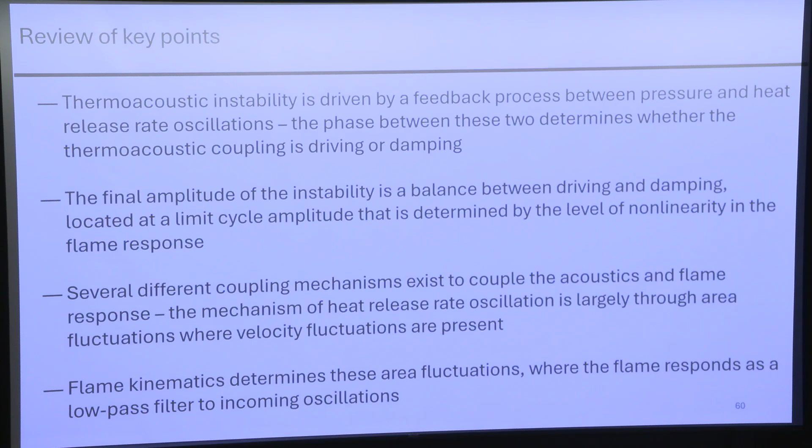The second piece is this final amplitude, or what we call the limit cycle amplitude, is determined by the level of nonlinearity in the flame response. One of the things we talked about last time was the fundamental place that this nonlinearity comes from. Using our craft here, we looked at flame wrinkles of different wavelengths.

The word used in the literature is kinematic restoration. If you have a wrinkle in the flame, as it propagates into itself and becomes not wrinkled anymore, that restoration of the flat flame and that very nonlinear destruction of flame area is referred to as kinematic restoration. It is the fundamental source of nonlinearity in flame response.

So if we have very weak driving of the system, you'll get very low amplitude wrinkles, and a pretty linear response as those propagate along the flame. But with big wrinkles with high curvatures, you get very nonlinear flame area collapse as a result of that shape. There are other sources of nonlinearity in flame response, and I'd be happy to talk about those at the end of class if folks have questions. But this is the fundamental one, and really the one I want you to take home.

So I'm going to skip to the last point here. One of the impacts of this is that flames act as low-pass filters. If we put really small wrinkles on the flame, these end up cusping and destroying themselves very quickly. And so the resultant flame area oscillation, and as a result, the resultant heat release rate oscillation, is very low because you have very quick destruction.

The way that we quantify this is using something called flame transfer functions. So we're going to have a quick intro to control theory for folks who have forgotten their transfer functions, which is okay.

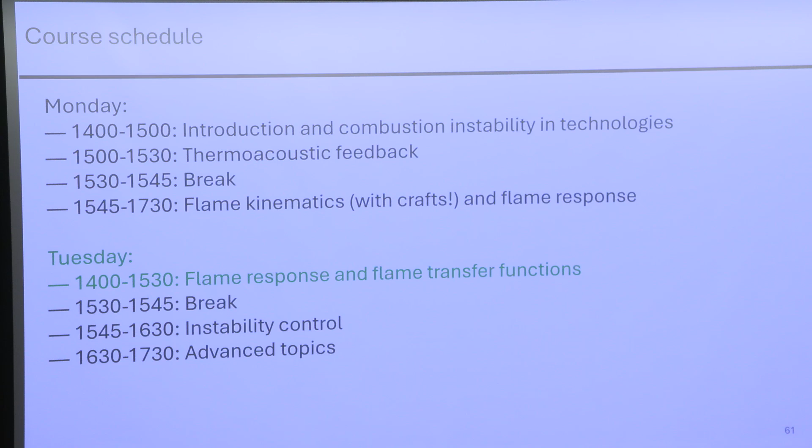We'll look at a ton of data that ties together things we've learned about basic flame kinematics and flame transfer functions. One of my main goals is for you to be able to look at a flame transfer function and infer the flame kinematics from it, which we'll talk about. Again, ignore the breaks, they're in the wrong place.

The last big topic we're going to talk about is instability control, and there are a bunch of different control mechanisms we use in real systems to damp these instabilities. We'll talk about a bonus control method related to hydrodynamic response, which is some of the research I'm doing. If anybody saw my plenary at the symposium two years ago, this will be a bit of a review; if not, this will be new and kind of fun.

And then there are some advanced topics. Just a quick reminder, I've purposefully left time at the end to address topics that folks are interested in, so be ready to talk about stuff at the end. Hopefully we will not have melted in this room that does not have air conditioning. Okay, so that's what we're doing today. Any questions before we get going?

No? Okay, cool. All right, so we're going to talk about flame response, and the framework we use to discuss this is called a flame transfer function.

One of the things I have found through my career is that control theorists have all the math you need to do the work, particularly in dynamical systems, but they don't always have the disciplinary knowledge to apply it. I've worked closely with control theorists and realized a lot of what we do, or things I thought were innovative, are things control theorists do all the time.

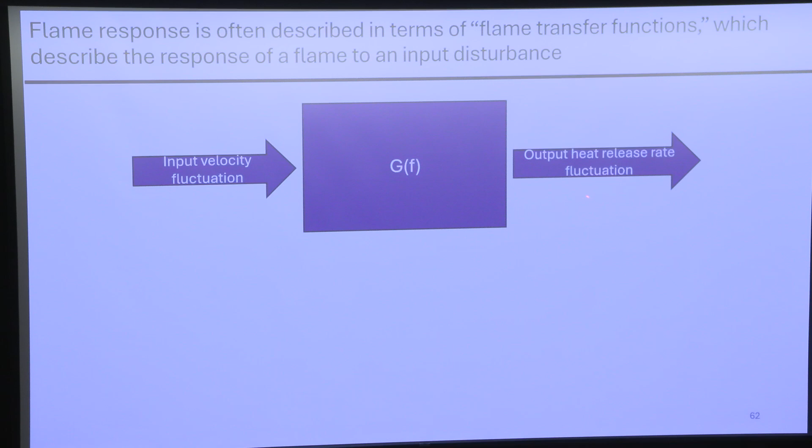You have some input, and in this case it's an input velocity fluctuation typically, or it could be equivalence ratio fluctuation or pressure fluctuation, depending on your coupling mechanism—but today we're going to talk about velocity fluctuations. What comes out of the system, where the system is the flame, is the output heat release rate fluctuation. The transfer function describes this input-output relationship. This is called a SISO system, a single input, single output system.

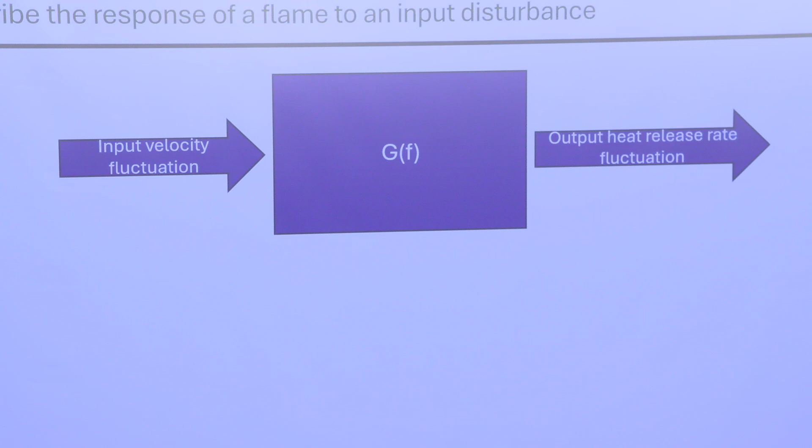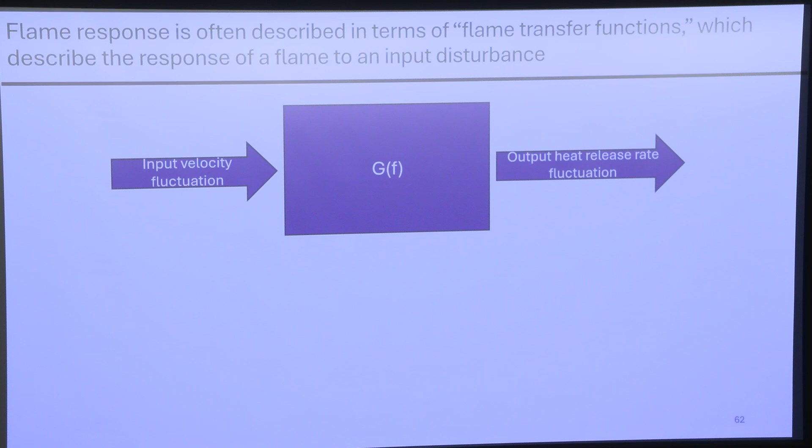There are multiple input single output, multiple input multiple output systems—there are a whole bunch of acronyms that go with this. This is a very common linear concept that describes responsive systems.

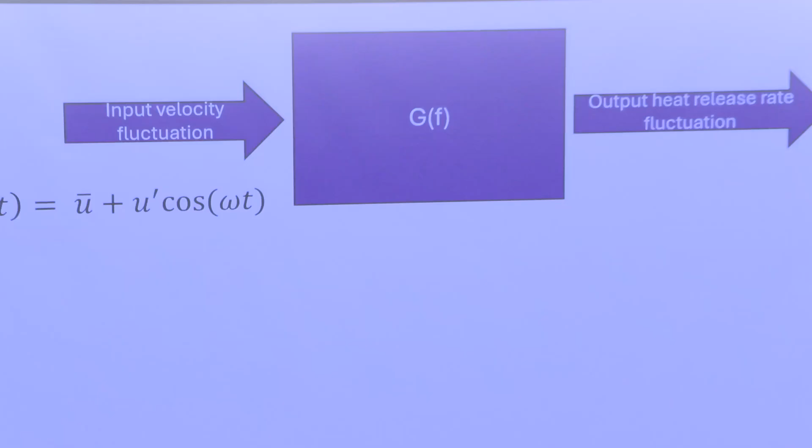So now at this point I did just put some math in the slides, so if you have the slides you're going to see all this. This is what we had been talking about yesterday: we said I have some input velocity field and it has a mean and a fluctuation. And I don't want to work in omega, so I'm going to throw in a 2 pi f, right? Like we said before, I don't want to do any of this in the time domain because I don't remember any of this jazz.

So we're going to do the Fourier transform, and when you do the Fourier transform, you end up with some input velocity fluctuation as a function of frequency. We'll talk in just a sec about how we measure these. You can see that our transfer function G is a function of frequency—it's a frequency domain concept, which is true here and in control theory more generally.

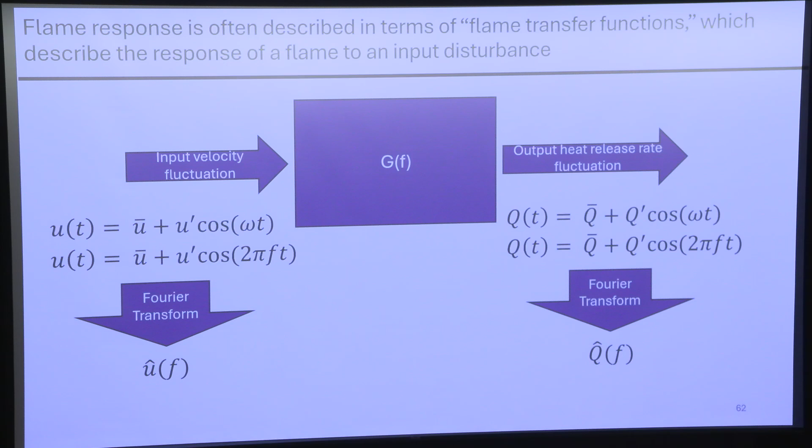All right, so that's the input. You can play the same game on the output: now I have some heat release response, a total heat release which is the time average plus the fluctuation. I go and do my Fourier transform, and now I have some Q hat of F—so that's at each frequency, the amplitude and phase of the heat release rate response.

To define my flame transfer function, I just take a ratio. Here it's a normalized ratio so the transfer function doesn't have a unit, because I don't know what the units of heat release rate over velocity are, and I'd like to be able to compare this between different systems. So what we do is take the response as a function of frequency, normalized by its time average, the input as a function of frequency, normalized by its time average, and then you get this transfer function.

Okay, cool. Remember that Fourier transforms are complex numbers. So what ends up happening is this transfer function has two components: one is the gain of the transfer function, and one is the phase of the transfer function. The gain is just the absolute value of this quantity, and the phase is the inverse tangent. If you're using MATLAB or something, you use either the phase or angle command.

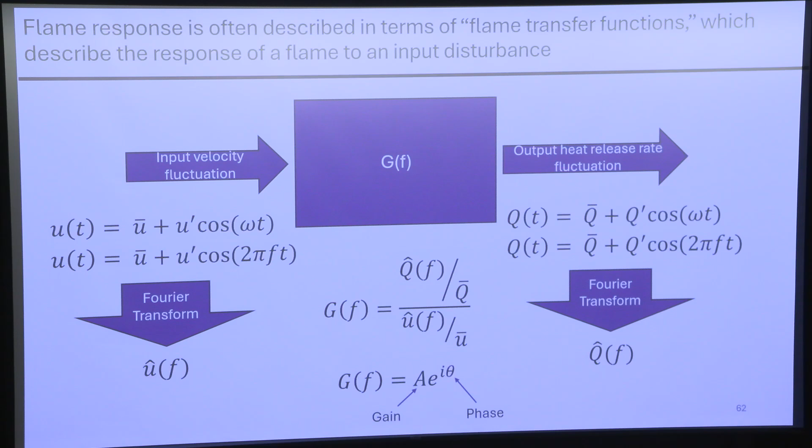So this is how we define it, and we get a gain and a phase. The way that we typically plot transfer functions is called Bode diagrams.

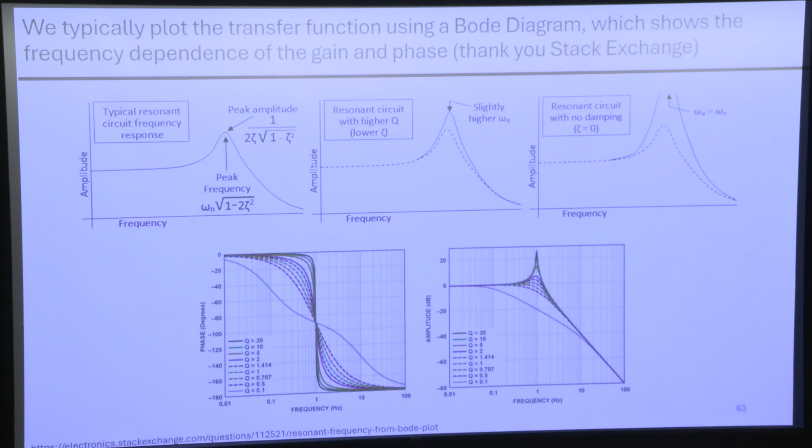I'm going to tell you a somewhat embarrassing but important story about paying attention in class. When I was in undergrad, I was totally convinced I was going to go into combustion. I was hardcore fluid mechanics, I was going to do gas turbines or bust. And I'm in this controls class, and by the end of it, the last two things we learned about were Nyquist diagrams, which, full disclosure, I still don't super understand. Sometimes I get a little wrapped around a pole. And then Bode diagrams. And I just gave up, I was like, I'm never going to use this again. 21-year-old Jackie really knew what was going on. Then I get to grad school, and I realize everything I do is a Bode diagram, and I greatly regretted not paying attention in that course. So the moral of that story is: take courses and pay attention to them, because they're going to come and bite you in the butt later.

But Stack Exchange has a really nice set of pictures, which is what I borrowed for this, that basically describe what a transfer function is.

Yesterday we talked about resonances. You don't just have resonances in acoustic systems, you have resonances in any oscillatory system. You can think about a spring mass damper system that has a preferred frequency, or a resonance frequency. So this is a really standard resonant or dynamic system, with a damping term in it, and so you have some resonance. You can see the way we're plotting here is just the amplitude or the gain of the transfer function, as a function of frequency. You can see the peak amplitude is at this resonant frequency.

And the amplitude's going to change based on what your damping is. So this zeta term right here is your damping. If you lower the damping, the peak gets higher. If you have a system with no damping, which you can do in theory but not in practice, you have a peak with an infinite amplitude at the resonant frequency.

Similarly, down here is just a plot of a bunch of different transfer functions. As you go up in color here, the damping is going down. So this is the amplitude, now on a log scale, which is often how we look at these things.

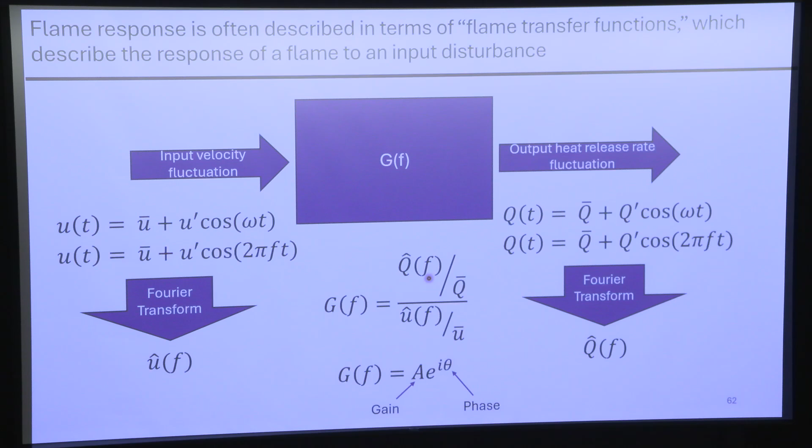If I need to know what the phase is for a thermoacoustic feedback cycle, this is a way to measure or calculate it, if you're calculating your transfer function. And here, at every different frequency, you can see the phase between these two disturbances. Okay, so this was what it looks like for just a general circuit system, right?

Not too exciting, but let's now look at what this looks like for flames. Before we start looking at a bunch of examples of transfer functions, I want to quickly talk about how we use them.

They're particularly useful for figuring out whether your system's going to be unstable or not. Because the transfer function is a linear concept, it by definition cannot tell you what the limit cycle amplitude is. Let me say that one more time: because the flame transfer function is a linear concept, it cannot tell you what the limit cycle amplitude or the final amplitude of the instability is.

This is super important. What it can tell you, though, is whether there's amplification—if the gain's greater than 1—or non-amplification, and it tells you the phase between these two disturbances that are super important in the feedback cycle. It can help tell you if thermoacoustic driving is positive for your particular system.

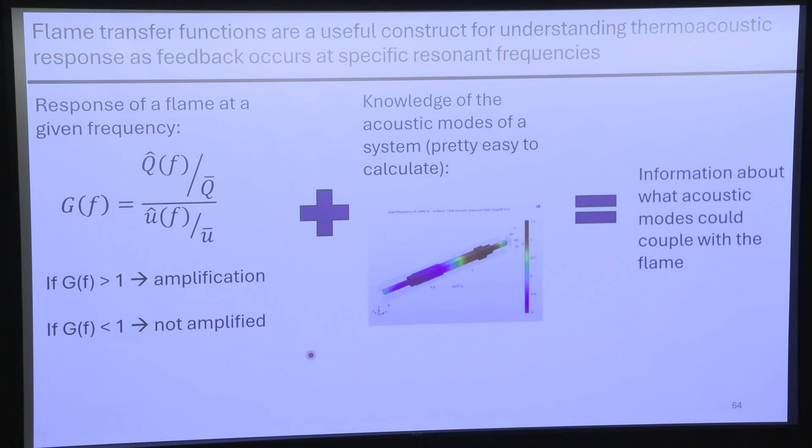What you end up with is information about what acoustic modes could couple with the flame. And if those acoustic modes are close to resonant frequencies of the flame, where you get these peaks in the response, then you could have some problems, right?

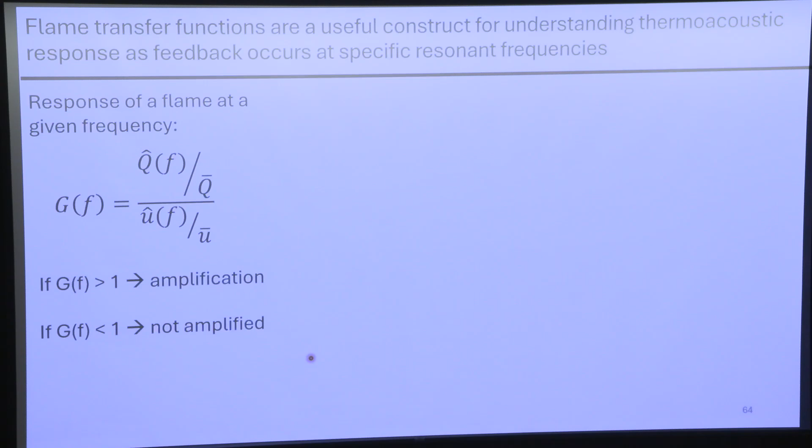So this is able to tell you if your system, in the absence of damping, could be thermoacoustically unstable or not. And that's super helpful, right?

And so that's why people have spent a lot of time measuring these and calculating these, and then combining them with pretty easy acoustic solvers, because they give you a warning signal—at this operating condition, you could have an instability if the system's not damped enough. Does that make sense?

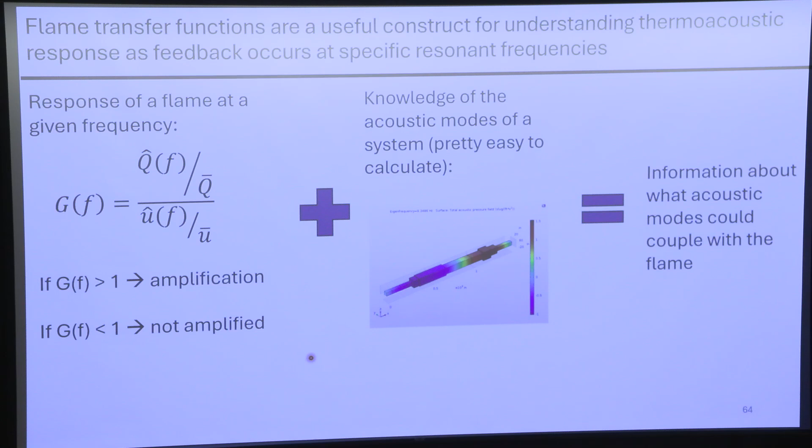All right, so they're super useful. Basically, every major gas turbine manufacturer has some thermoacoustic modeling program. They're all built in-house. There's no software you can go out and buy, where they stick in a flame transfer function, either a measured one or a calculated one. They have very nice acoustic solvers, and they tell you, over different operating ranges for different engine configurations, where are we going to get instabilities?

Where are those islands in the operating map that could be unstable? And that's very, very helpful before you go do an engine test and find an instability on the fly, which can be kind of dangerous. Okay, so this is why we want to know.

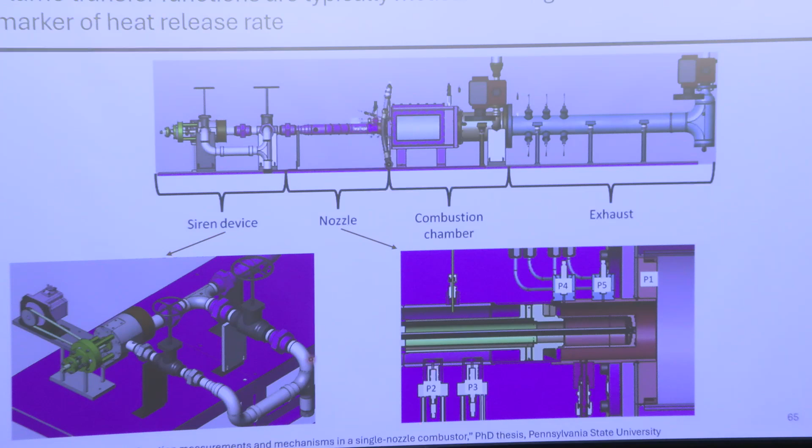All right, so first we're going to talk about how we measure them. And to do this, we're going to use an example from the lab that I inherited. This is an experiment that was built by a guy named Nick Bunce. He was one of Dom Santavicca's students. Nick and I did our PhDs at the same time, except Nick was at Penn State and I was at Georgia Tech, but our groups worked really closely, so I was very familiar with this.

And I'll show you later on, Nick did an experiment that I thought was extraordinarily clever, but it only got published in his thesis. It never got published in a paper, and it makes me sad because it was a very good piece of work. So you're going to see it today.

Okay, so this experiment—basically we have some sort of fuel injector here, and then a combustor, and then an exhaust section. And this is a back pressure valve and that kind of stuff, right? So you could pressurize the system.

Upstream of the injector nozzle is a siren. In this system, the air comes in here and gets split. There are these two gate valves that control the split between the main pass and the siren pass.

Inside, you can see this thing has a belt that's turning. In real life, we put a cage over it so you can't get your hair stuck in there or something. Basically, inside this siren, there's a stationary plate with a bunch of holes in it, and then there's a rotating plate with one hole in it. As the holes line up, you let air through in a periodic fashion.

If you've ever seen an old surfer film where the shark's coming in and some guy is cranking a siren and it has this wail to it, that's what this is. We don't make grad students crank it though, we have a motor that does it for us.

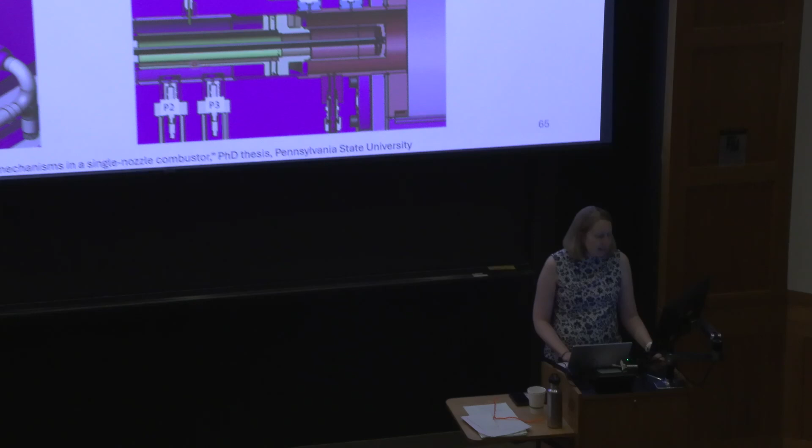So what we do is we operate the combustor at a stable operating point, so there's no self-excited instability. The flame's nice and quiet. And then we input a frequency.

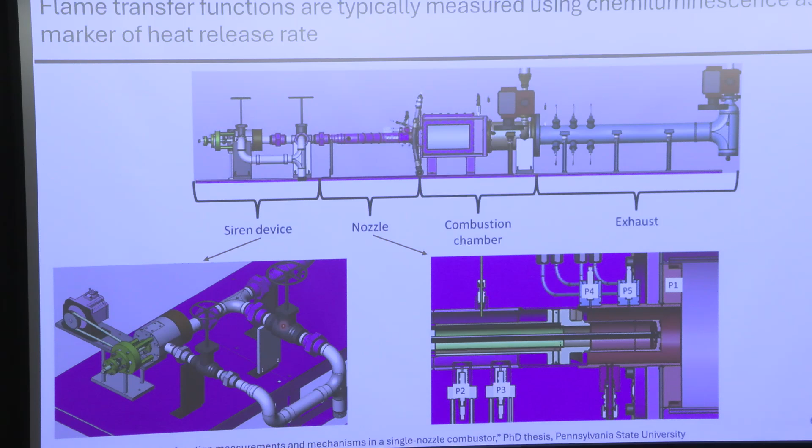We tune these gate valves so that we get some small amplitude - typically the standard across measurements is 5%, so your U prime over U bar is 5%, which is a small number, so you get the linear response. You do this at a whole bunch of different frequencies so that you get the frequency response of the flame. Based on the transfer function, you need to be able to measure the acoustic velocity fluctuation, and we do that with something called a multi-microphone method.

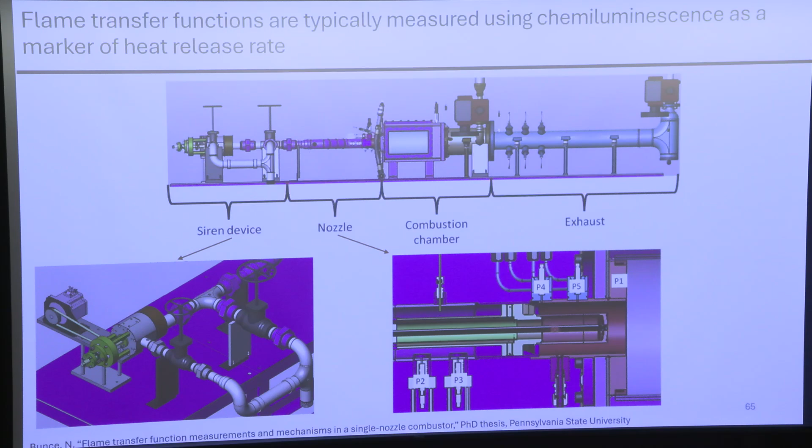You can see in this injector, these are the swirler vanes here, there's a center body, and the fuel is injected on the swirler vanes, or it's perfectly premixed upstream. For these studies, it was perfectly premixed, and we can get into why later if you're curious. So you have a perfectly premixed mixture of fuel and air.

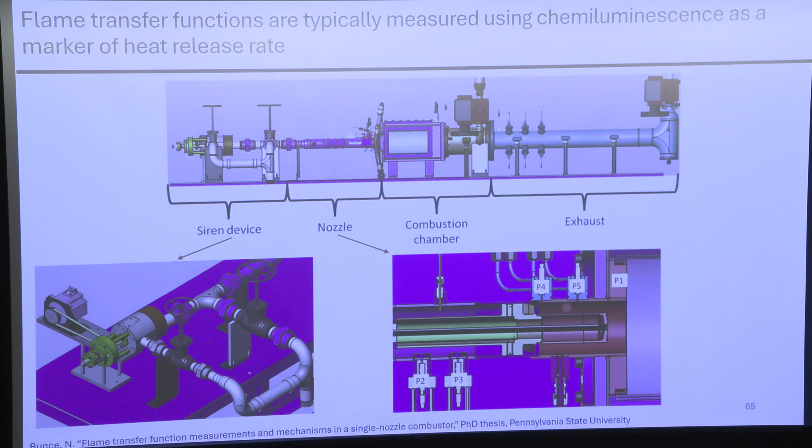It's being forced by the siren, where U prime over U bar is 5%. And then just ahead of where the flame attaches at the end of the center body, we measure two pressures, two acoustic pressures. These are piezoelectric pressure transducers in water cooling jackets, because it gets pretty hot here. We can use those two pressures to calculate the acoustic velocity fluctuation.

So a quick review of our acoustics from yesterday. This is one of the reasons that I went through and looked at this solution. What I'm going to show is called the 2-microphone method, but you can do this with any number of microphones, and your accuracy goes up as you have more microphones.

Let's assume we have a constant area duct with some acoustic mode in it, and I'm measuring two pressures, P1 and P2, at two distances, say 0 and L. Doesn't matter where you put the reference point. Like we talked about yesterday, the solution to this plane wave propagation through this duct looks like this.

We're assuming that we only have propagation in this direction. This breaks down if you have an acoustic mode in a transverse direction. But in a duct, the duct is this thin and this long, right? So you're really only going to have that longitudinal mode. And so the solution looks like this.

We saw this before. It's the real part of the forward traveling wave and the backward traveling wave, all multiplied by your fluctuation in time. So then I told you I don't like working in the time domain. Plus, I'm forcing this at individual frequencies.

We go through, and every 10 or 20 hertz, we force it, make a measurement, force it, make a measurement. There's no sense in doing this in the time domain. We're going to do this all in the frequency domain. So I can take the Fourier transform of my two pressures here, and now I have a solution that looks like this.

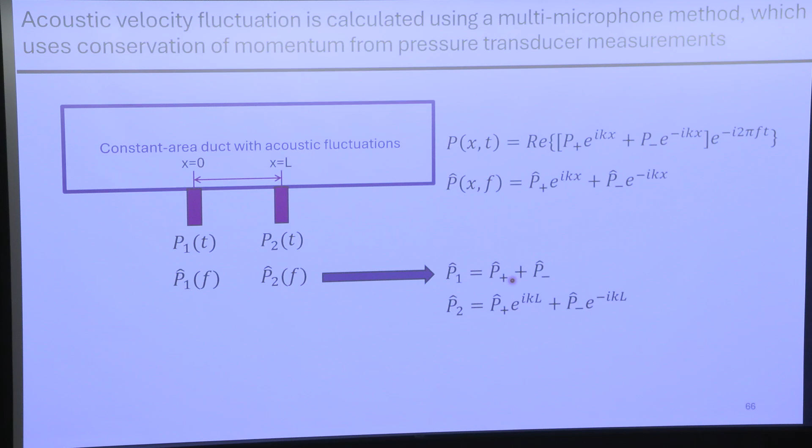Now I just need to do some math to turn P1 and P2 into P plus and P minus. I put in my x locations into each of these equations. So P1 is P plus plus P minus. P2 is that with some phase offset because of that distance. And then, that's linear - you can math that, and you end up with an equation. You basically get P plus and P minus. Then I've got to turn this into a velocity, and I can do that using momentum conservation.

So this is the momentum conservation equation in the frequency domain, assuming no viscous losses and no mean flow effects. This works because there's basically no viscous losses in acoustic fluctuations until you get to insanely high amplitudes—but we're at 5%, so we're not going to have that. And the mean flow, basically, if the Mach number's low, it's fine. The mean flow velocity through this channel is like 40 meters per second, and the speed of sound at the temperature we preheat it to is almost 500 meters per second.

So we're solidly in a low Mach number regime. And so basically, you can use the P plus and P minus you get to find a velocity fluctuation at any location along here, which is very useful. So this is how we get our velocity fluctuation.

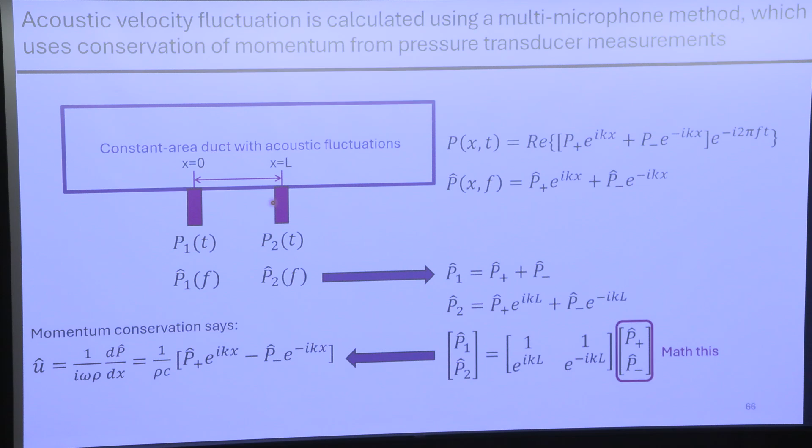How do we get the heat release rate fluctuation? There's no device that measures heat release rate directly. If somebody wants to invent one, come talk to me at the break—you and I will patent it, and then we'll become very rich together.

And then what he did—you don't need to image it, you could just use the photomultiplier tube. So basically, this is just a little device, a few hundred dollars. It turns photons into electrons, and it's got an amplifier in there. So if you filter it at the right wavelength, you can get global chemiluminescence measurements at a pretty high repetition rate.

Usually we're taking this data at like 20 kilohertz, so we get really nice time resolution of both the pressure and the chemiluminescence. But one of the things that Steve wanted to see was, do the images line up with what we're measuring in the PMT? And they do.

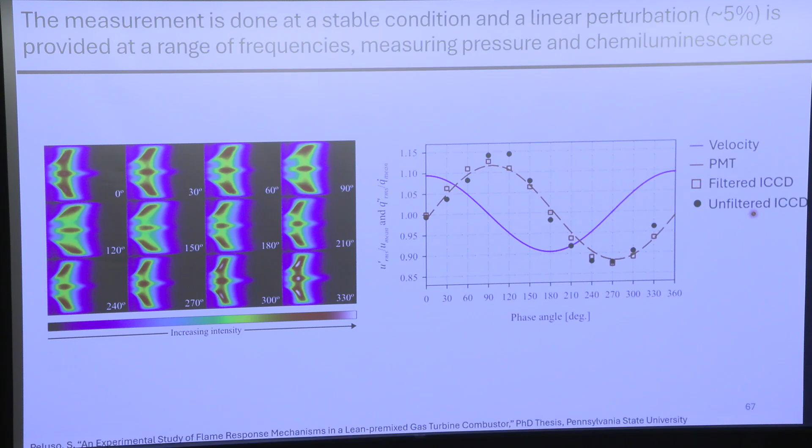The dotted line is the super high resolution global chemiluminescence measurements. The squares here are chemiluminescence filtered at 430 nanometers, which is CH star. And then the dots are just like the total signal. Everything's going in concert.

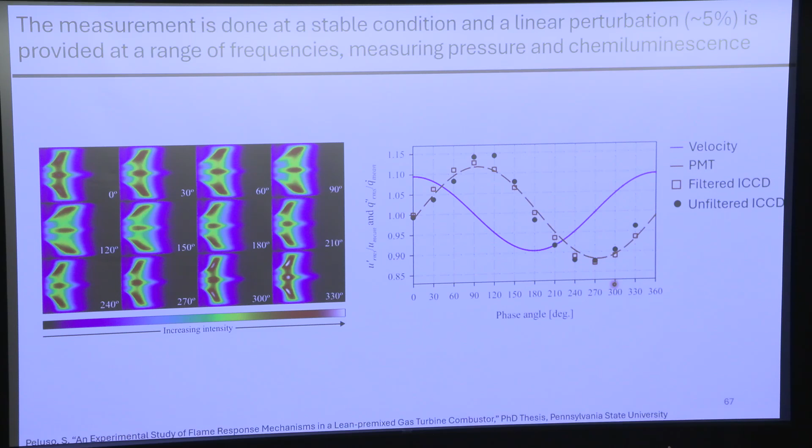So this is good. You basically measure, you estimate your Q prime over Q bar from this PMT. And because you have this data at such a high repetition rate, you can very confidently, with high frequency resolution, do a fast Fourier transform and get your frequency domain response. We have pressure data at 20 kilohertz, and we can turn that into acoustic velocity fluctuation, and then you can build your transfer function from that.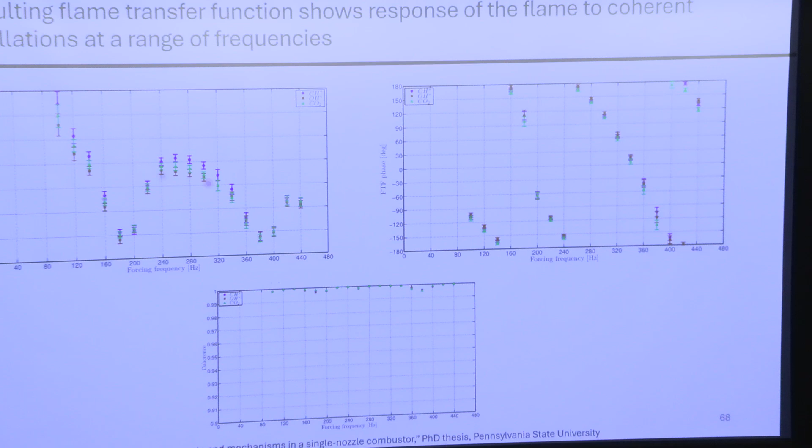And so this is what it looks like. This is going back to Nick's thesis, and I'll walk through what each of these images are. So on the left is the gain of the transfer function. You can see the first frequency he looked at was 100 hertz.

The motor gets a little burnt out if you run at 80 for too long, and if you look at his thesis, he did a lot of these measurements, so he started most of them at 100. But every 20 hertz, he goes through and reruns the experiment. The PMT systems we have actually have 3 PMTs with 3 different filters, a CH star, an OH star, and a CO2 star.

This just shows the signal from all 3 of them, which line up really closely, which is good. As a function of frequency, you can see initially—if this line here is a gain of 1—you start with a gain greater than 1, so an amplification. You get a node, it goes back up, you get a node, and then it goes back up. This is a very typical flame response for these types of flames, and we will talk about why in just a second.

So this is the gain of the transfer function, and this is the phase of the transfer function. This is what's called a wrapped phase—he's going from negative 180 to 180. I prefer to look at phases unwrapped instead of wrapped, but whatever, it doesn't really matter. Just imagine, as it repeats, you could just imagine it continuing to go down.

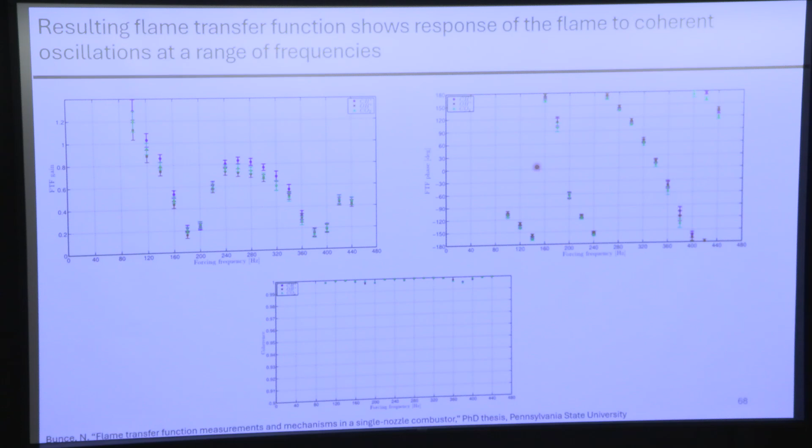But today, I really want to focus on the physical meaning, because it's kind of interesting that they have these shapes. So we're not going to talk too much about the phase. We could talk more about it later if you want. But let's just focus on the gain here for a second.

So this is just the picture you saw before, and I'm going to highlight a couple things. I've put a dotted line across where the gain equals 1, so you can see where there's amplification. So the first is that at low frequencies, the flame acts as an amplifier. And then, granted, non-monotonically, the gain decreases as the frequency increases.

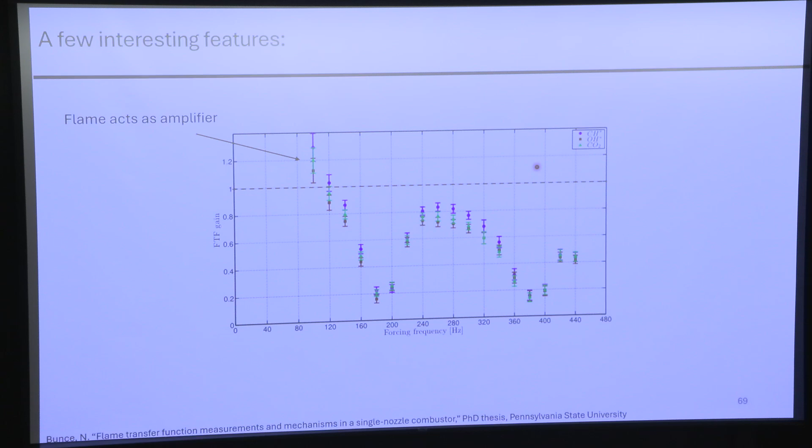And why is that? Because flames act as low-pass filters. So this is your first, it's a weird filter, right? But the gain goes down as you get to higher frequencies. And if the siren wasn't going to explode past 440 hertz, you'd see that continue to go down. Okay, cool.

One thing that's not shown here, because the siren would burn out, you can show from theory for any transfer function, the gain at a frequency of 0 should equal 1. And that's just math. And there are some measurements, people who do these differently, where you can do very low frequency forcing. You can see their measurements get to 1 at a frequency of like close to 0. So that's good. That checks out.

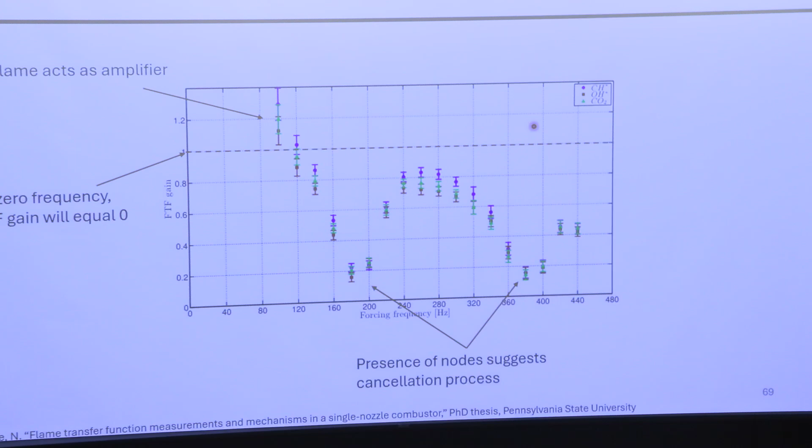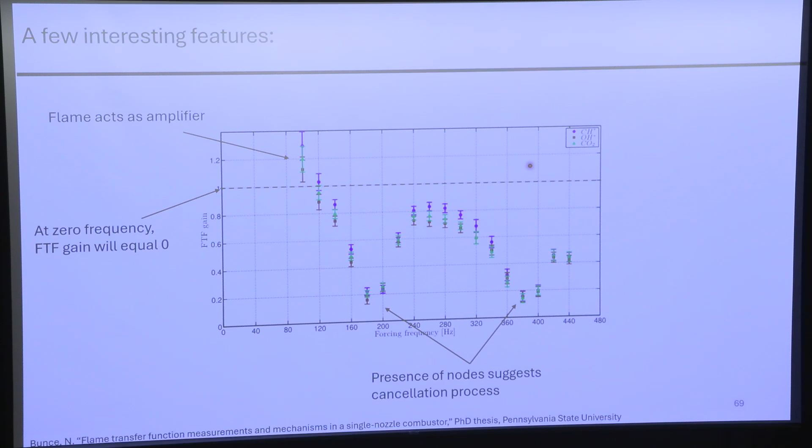But the super interesting part of this shape are these two nodes. And these two nodes suggest the presence of a cancellation phenomenon. And so this is why we spent so much time with pipe cleaners yesterday, is because what we're going to do is we're going to work through the flame kinematics and show what's canceling, because everything we talked about yesterday describes why these things look the way they do.

Okay, so one of the nice things about Nick's thesis, which is you can get every Penn State thesis for free online, is that he did a ton of different variations. There was a period at the early 2000s where it was very in vogue to measure flame transfer functions. You'd go to Turbo Expo, which is where most of the instability work for the gas turbine community is presented. And it's just like flame transfer function paper after flame transfer function paper after flame transfer function paper. There are a lot of flame transfer functions.

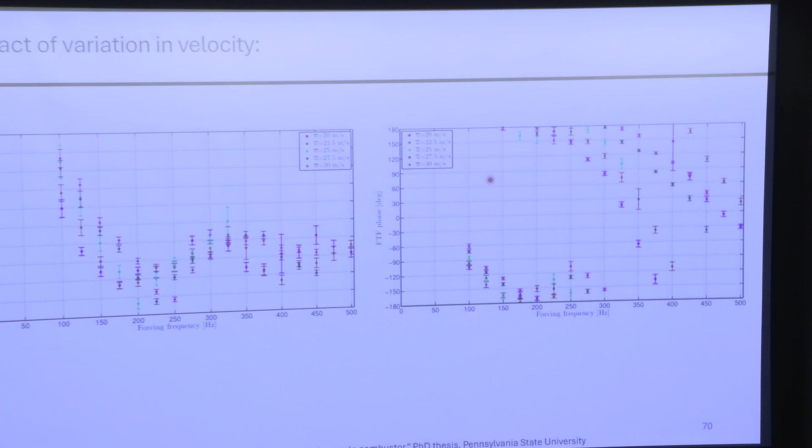And so we spent a lot of time trying to understand what's going on. So the first variation was a variation in velocity. And so you can see as we go from blue to purple, or magenta, I don't know, we're increasing velocity from 20 meters per second to 30 meters per second. It's not a huge increase in velocity, but 50%, not so bad.

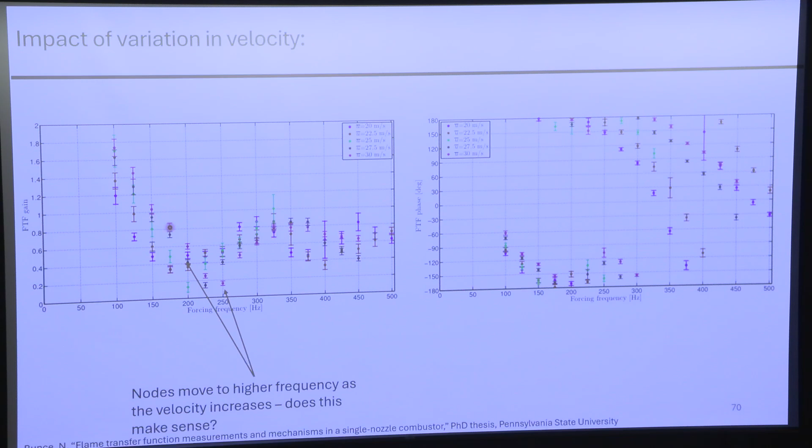And what you can see is that the node, the place where the minimum occurs, moves to a higher frequency. Right? So for the blue signal, the minimum is over here, right? So this one comes down and then goes back up. That's the lowest velocity. For this one, the purple comes down and then goes back up. So there's a 50 hertz difference between these two minima. Does this make sense?

Similarly, you can look at this in the phase. The phase between the two oscillations is bigger, it's more negative, for the slow-moving velocity than it is for the fast-moving velocity.

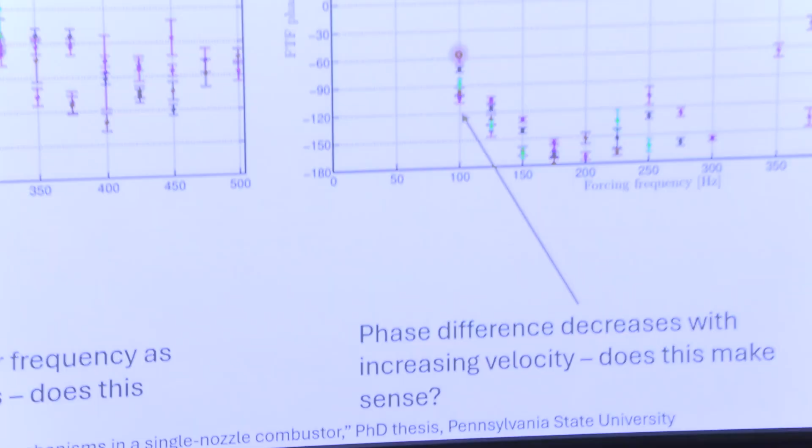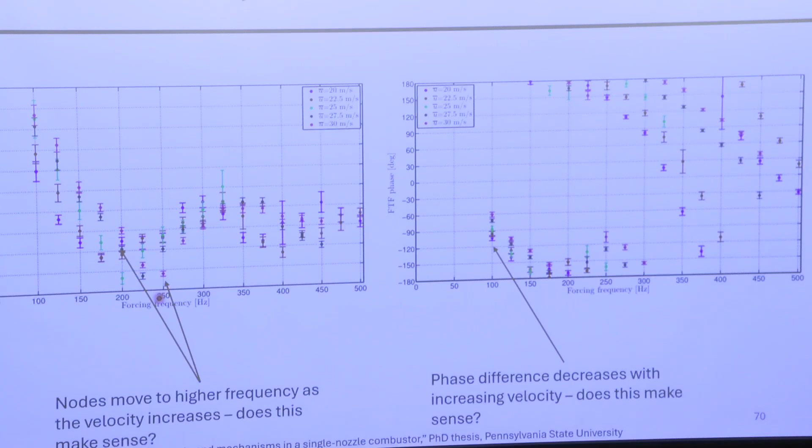Free stream velocity-ish, right? So if you increase the free stream velocity, that coupling velocity disturbance will be convecting faster, and the phase between your two oscillations will get shorter. Lower phase is shorter in time. And the frequency at which these phenomena cancel goes to a higher frequency. So here, phase is super important, because the phase difference between the input perturbation and the output heat release rate oscillation is really what matters. If your input perturbation is just moving faster, that phase and time delay or phase lag is going to get shorter. Does that make sense?

Let's play this game again. Equivalence ratio: he went from 0.6 to 0.75. So 0.6 is the blue, 0.75 is the black. If you look at the phase differences, you can see that 0.6 has the largest phase difference and 0.75 has the smallest. Why do we think that is? Equivalence ratio increases, S sub u, the burning velocity increases. So what happens to the flame length? It shortens. So now your source of heat release rate fluctuation, or the flame center, is closer to your disturbance, and so the phase lag gets shorter.

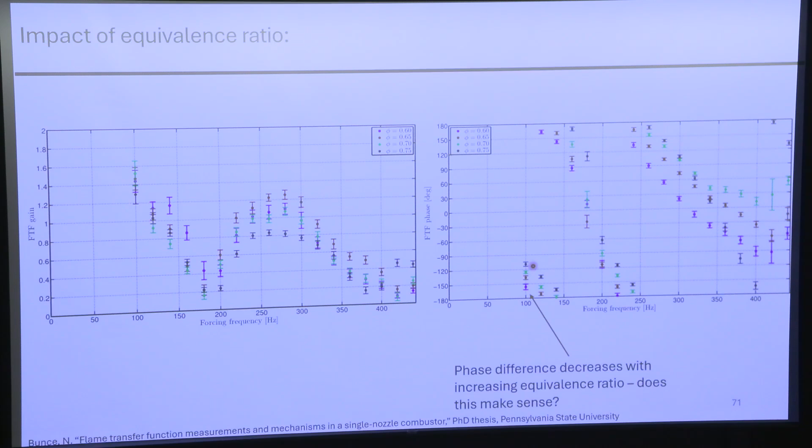One more game: preheat temperature. It can go from 373 Kelvin to 473 Kelvin. The nodes move to higher frequency as the temperature increases, and the phase difference decreases with increasing temperature. What's happening here? As we increase the temperature, what happens to the flame? Speed of sound increases, which is interesting, but it's a second order effect. Your burning velocity increases, your flame speed gets faster, so your flame gets shorter, and now your delay time is shorter as well.

So remember, one of the main messages yesterday was phase lag is all that matters. Now you can see this showing up really nicely in our measurement of phase lag, which is the phase of the transfer function. But very importantly, also the shape of the gain response in frequency space. If I have a system whose resonant frequency is 250 hertz, then running the velocity faster means I have a lower gain than if I run the velocity slower. The resonant frequencies of the system are what they are at a given temperature, given speed of sound. So how I change the flame shape and these delay times determine how much the flame responds. These changes could have really big implications for whether or not I have thermoacoustic feedback. You can understand these using kinematics. Any questions on this before we go forward?

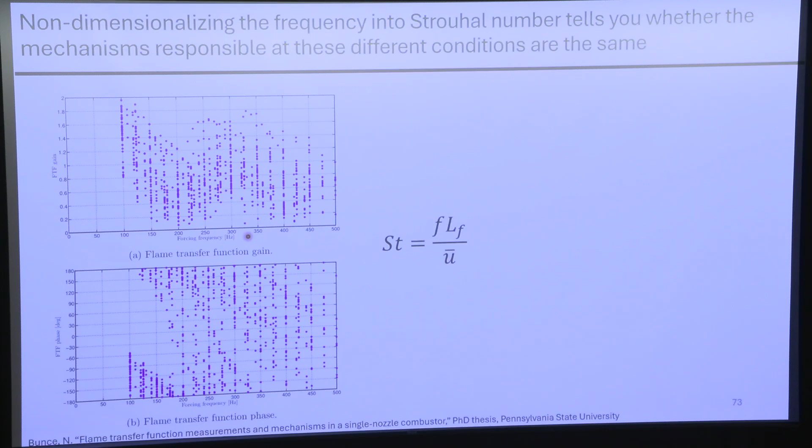Part of the problem is that here you're varying velocity and equivalence ratio and preheat temperature and all this other stuff, and having a dimensional quantity on the x-axis isn't a great way of looking at that. So one of the things we often do, like good little fluid mechanicists, is non-dimensionalize the frequency into what's called the Strouhal number. To do that, you multiply the frequency times the flame length, divide by the mean flow velocity. When you replot all of these versus Strouhal number, it looks a lot better. It's not 100%, there's still some scatter, and if you put all the uncertainty bars in there, it'd be an absolute nightmare. But it does collapse things pretty well, and that works out pretty nicely.

I hesitate using the word collapse. I was in a seminar once with a colleague of mine who really grilled the seminar speaker about their meaning of the word collapse, and I think he would say this data hasn't collapsed. But it has certainly gotten better through this non-dimensionalization.

Okay, so this is what actual data looks like. This is on an atmospheric rig, but people have done this in pressurized studies too. This is industrial hardware.

So the next question is, what's up with this cancellation phenomenon? Why do we see these nodes and antinodes in the frequency response? The answer goes back to the theory we talked about yesterday.

So now we're going to go back to our pipe cleaners. Everybody get your crafts out. And we're going to talk about level set formulations.

The paper this is from is one of the best starter references on this. This was work done by two of my favorite academic siblings, Preetham and Santosh Hemchandra, when I was pretty new in the group.

It does a really nice job explaining what's going on. All the theory in the paper, which we saw yesterday, covered both a cone flame and a wedge flame. We're only going to look at wedge flame results because that's what we have pipe cleaners for.

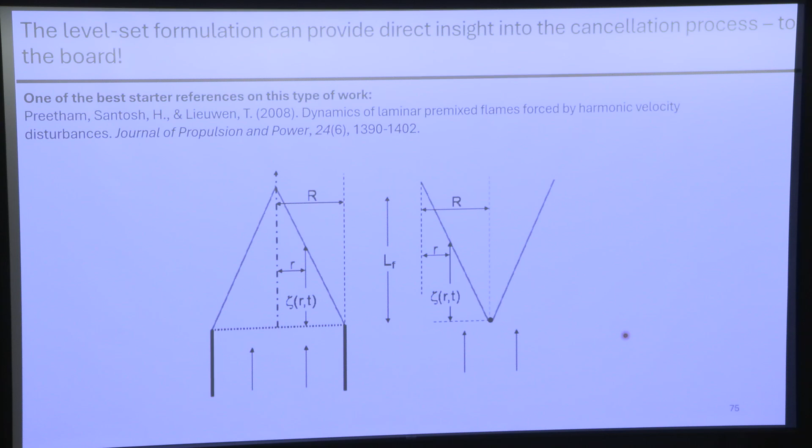Before we jump in, I'm just going to define a few other things on the bottom of the board that are going to be useful as we go through.

One of the quantities we talked about yesterday was the flame aspect ratio beta, which is LF over R. This is just a non-dimensional way of talking about your flame speed versus your flow velocity, the time-average shape of the flame, or that flame aspect ratio.

Another non-dimensional quantity they varied in this study that is so insightful, they called capital K. This is not little case k, which is the wave number. This is capital K, and this is equal to U naught over UC.

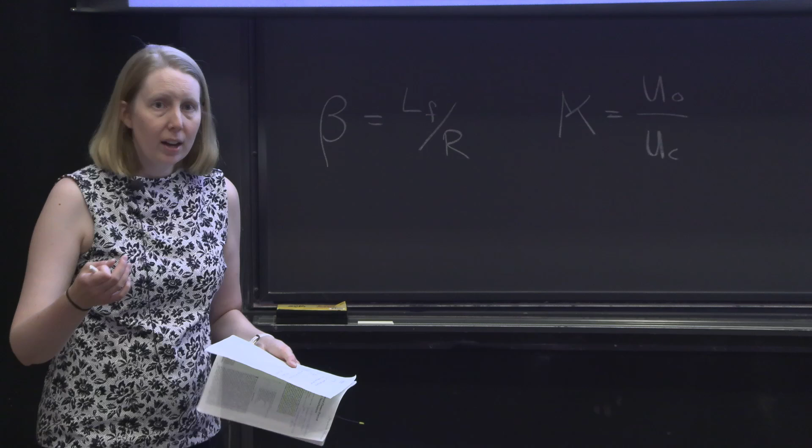If you remember yesterday, I made a big deal over the solution to the equation for d zeta dt, which had both a homogeneous solution and a particular solution, where the homogeneous solution described the disturbance convecting along the flame created by that boundary condition, or your pipe cleaner being stuck to your straw. The particular solution is the local flame response due to the flow oscillating everywhere in the domain. So we had these two disturbances, and this ratio describes the ratio of the convective velocities of those two disturbances along the flame.

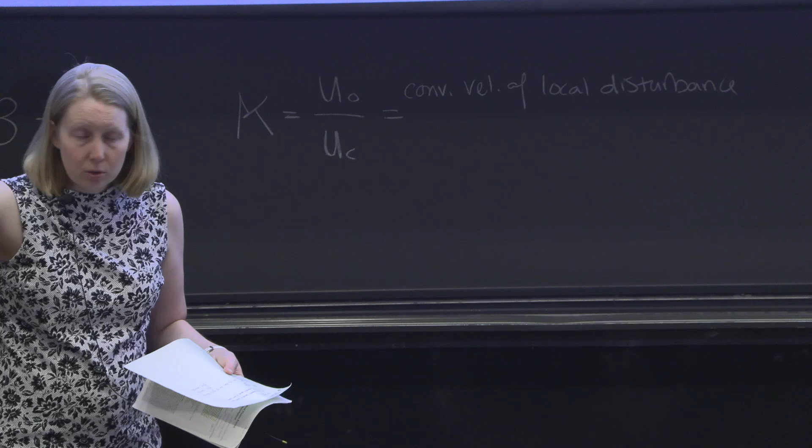U naught is the convective velocity of the local disturbance. This is the fact that the flow is fluctuating everywhere, and we said that U is equal to U bar plus some U prime, or here they use epsilon times cosine omega t. So that's that epsilon-sized oscillation convecting along the domain downstream with a velocity U naught.

That root wave, that base wave, that homogeneous solution, convects along the flame at some convection velocity U sub c. So this is the convective velocity of the base wave, or the non-local disturbance.

This is wildly important. If we have these two disturbances convecting at the same speed, they're always going to be reinforcing each other, because the first time they affect the flame is at the base, and they all move downstream together. But if you have two disturbances with different convection speeds, you're going to get interference phenomena. It's just facts of life, that's what happens. So this parameter K basically tunes that interference.

Okay, so questions on K? We're going to be looking at variations in K a lot.

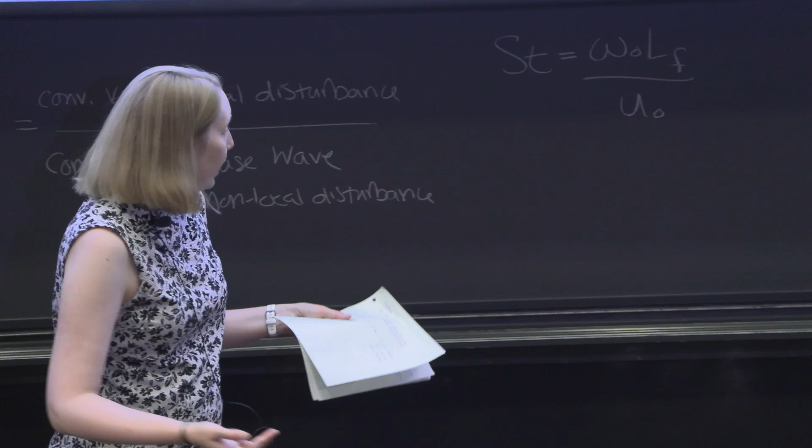All right, cool. So they define the Strouhal number, because a bunch of the plots I'm going to show are Strouhal number as omega naught LF over U naught. Omega naught is the frequency at which the flow is being oscillated, flame length, which is up there, and then flow velocity.

They come up with this quantity, alpha, which if you do the math, just basically takes a term that's really gross and turns it into one value. So this quantity beta squared over beta squared plus 1 shows up in a bunch of places. I think Preetham, who is a brilliant but somewhat impatient individual, just said, can we turn this into one thing? And then alpha was born.

This is important, however, because the other thing that falls out of this, they define something called eta, which is K times alpha. So this is your ratio times some effective flame shape.

So if eta is equal to 1, then UC is equal to U naught. If eta is greater than 1, then UC is less than U naught. And if eta is less than 1, then UC is greater than U naught. Did I do that right? Yeah, I did. Okay, cool.

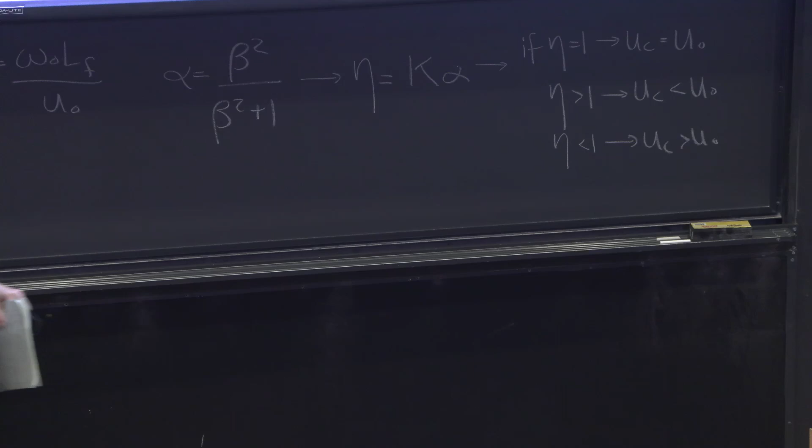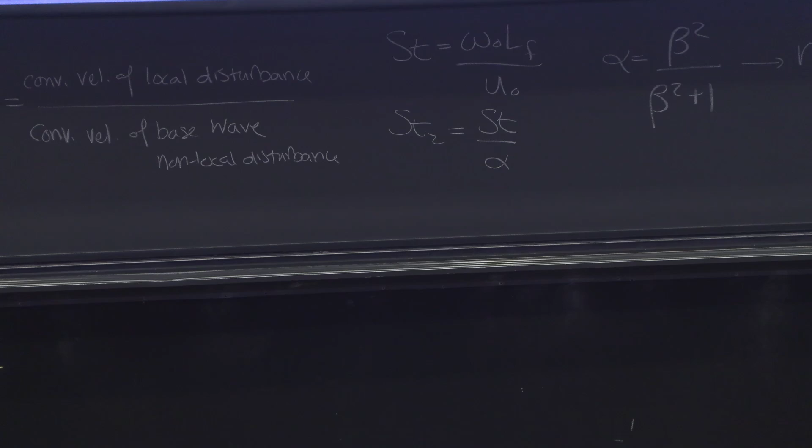So really, the plots they put together are in terms of eta, not in terms of K. But basically, for a given flame shape, it tells you what's going on with K, which is what they did. And finally, it doesn't matter, it just falls out of the math. They defined a second Strouhal number, Strouhal number 2, which is just Strouhal over alpha. Just a shape effect, doesn't really matter. The big deal here is this eta parameter that we'll see in a second.

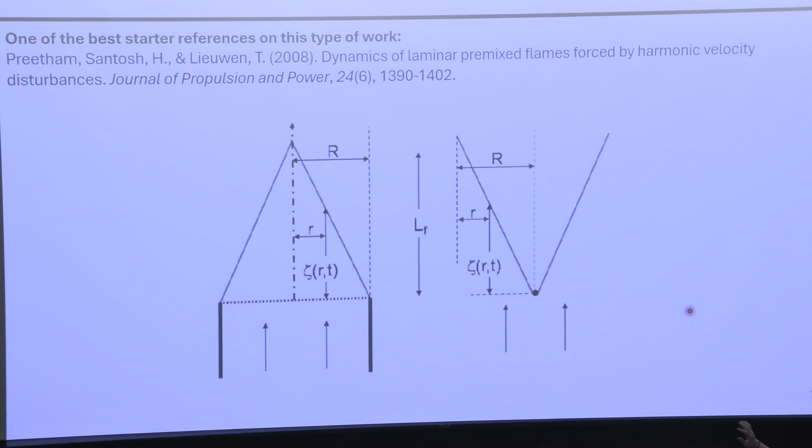Okay, so let's look at some results. So they did the math to look at the time variation of zeta, and then put it in the frequency domain, and solved for the dynamics of zeta at a whole bunch of different frequencies, or Strouhal numbers, playing around with some of these other parameters, particularly k, to see what would happen to the response of the flame.

And so the response here is defined as the normalized area fluctuation, A prime over A bar. So they integrate all the fluctuations, they get a flame area, and that flame area fluctuation over the time average flame area is their response. Okay, they give the response, I'm running out of room here, that's okay.

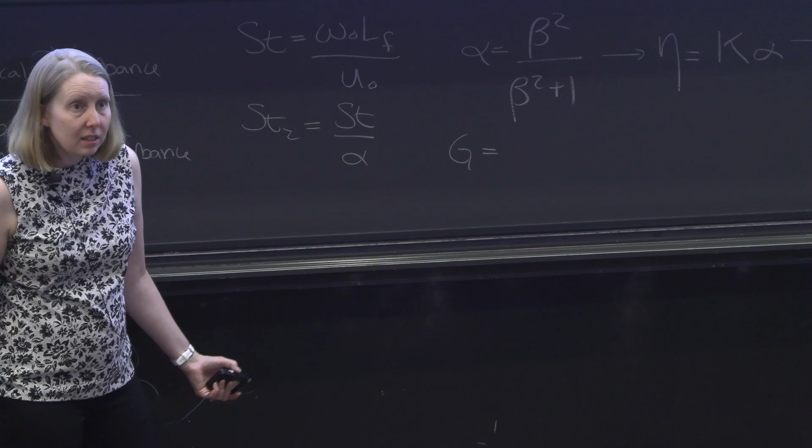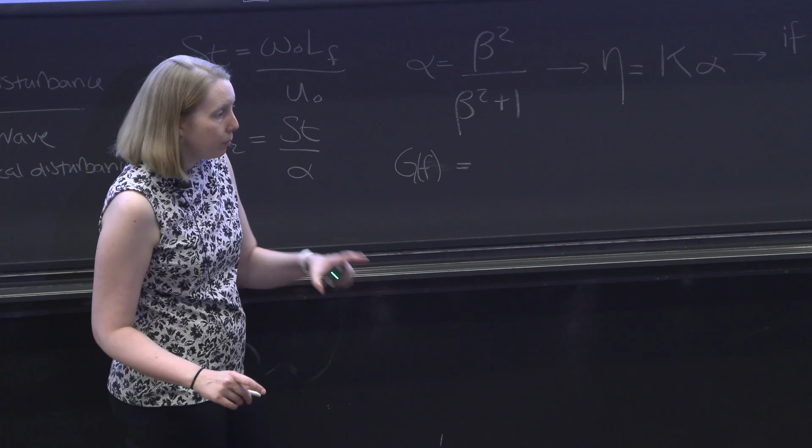In terms of this quantity G, which is the reason I picked G before, because we're going to see it again. This is essentially the transfer function. G is a function of frequency. And when you do the math, which I'm not going to go through, but you are highly encouraged to read this paper because they do a nice job stepping through it, there's two components: G of the base wave plus G local.

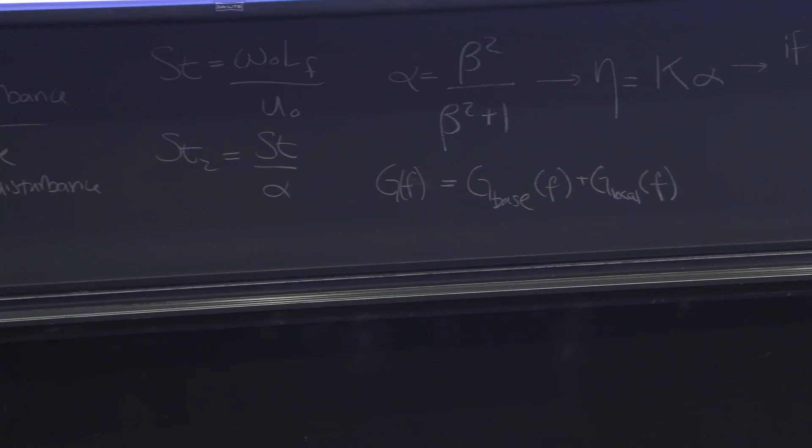And like I said, when you solve for zeta, you end up with those two parts of the solution. You can similarly get the area fluctuation contributions from these two different disturbances, and that's what they play around with in the study: the base wave contribution and the local contribution.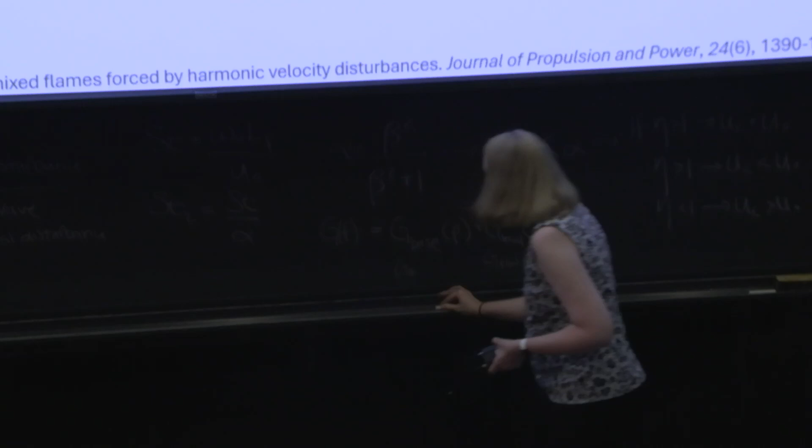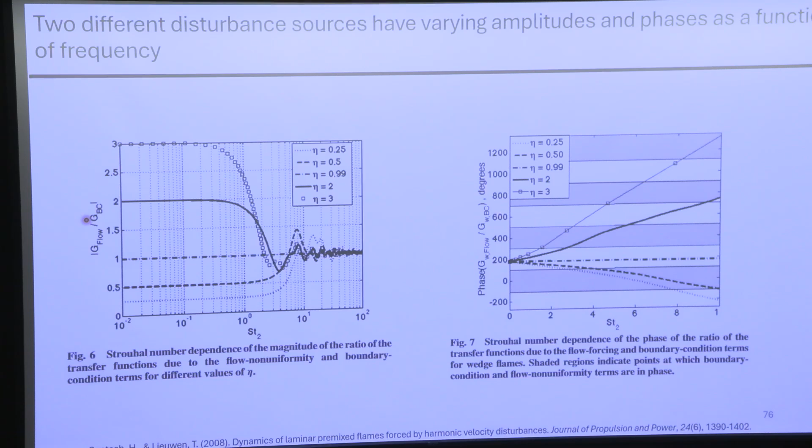Okay, so let's look at some results now that I've really talked this up. So this plot on the left: G local, they're calling G flow, and G base, they're calling G boundary condition. This is the ratio of the response amplitude to the flow versus the response amplitude to the base. So these two different disturbances, as a function of Strouhal number, how do they compare?

The first one I want you to look at is this dot dash, it's 0.99 because if it equals 1, you get some divide by 0 jazz going on, and that throws off your solution. So let's say this is eta approaches 1, and you can see that if the convection velocity of these two disturbances are the same, then the area contribution of both as a function of frequency is the same. Their ratio is just 1.

However, if you have either UC less than U naught or UC greater than U naught, you have these interesting phenomena where, in particular, you start to get these oscillations around 1 at higher frequencies. Note that this is a log scale, so these are much bigger differences than down here.

But you start to see interference between these two oscillations as a result. I think the much clearer way - and here's the phase, which is really important, so let's talk through it. So eta equals 0.99, so 1-ish: the phase is basically constant across the board because they're moving at the same speed down the flame, so regardless of the forcing frequency, they're always going to be acting together.

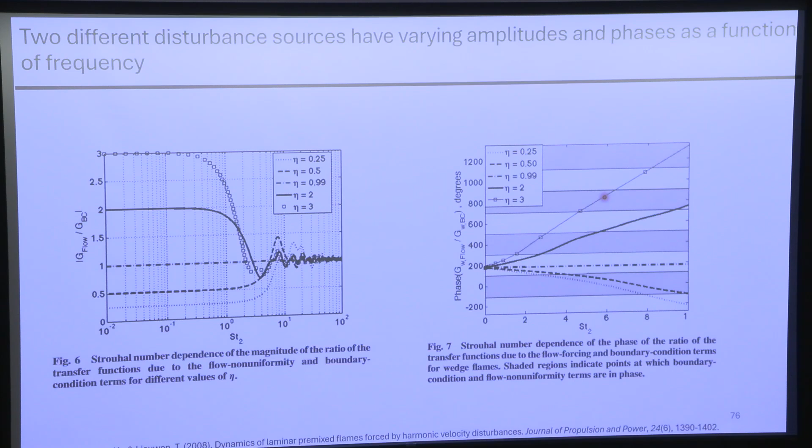Okay, this is the big one. So this is the conical flame, which isn't super exciting. What I really want to focus on is the wedge flame.

So this is your pipe cleaner. And what this is showing is the transfer function amplitude - both contributions together as a function of Strouhal number. You can see as you go towards 0, it goes to 1. So that's what transfer functions are supposed to do.

Now, because we've got everything normalized, we don't have a divide by 0 problem anymore. So if you look at this eta, you can see it just goes up. But if you look at every other case, you get these really nifty nodes and antinodes in the transfer function, just like we saw in the measurements. So what's going on here?

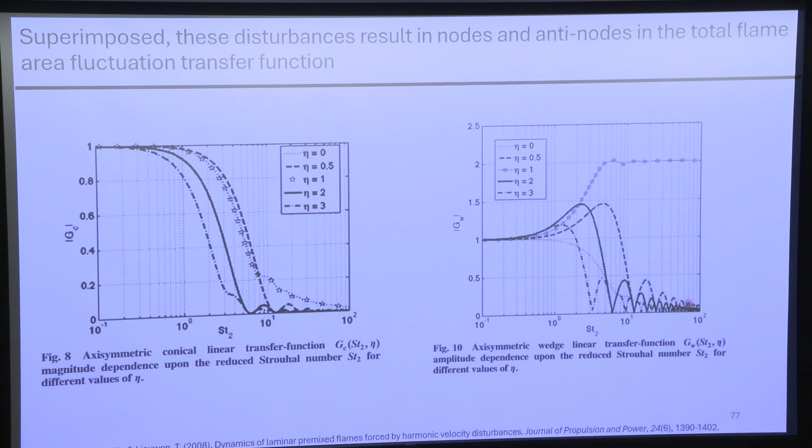So now we need to go back to our pipe cleaners here. So if we just had the root wave, right, and let's say this oscillation is the root wave, this is going, at some frequency, to cause an area disturbance that convects downstream along the flame.

However, if you now have the same disturbance - let me try something - okay, if you have the same disturbance and it's moving at the same velocity, then these guys are always going to line up, and so they will constructively interfere with each other.

If one of them is moving faster, in the reference frame of one of these, you'll have points where they're lined up, but then you'll also have periods in time where these destructively interfere, because this guy's moving faster than this guy. And then they constructively interfere again, and then destructively interfere again. So two waves traveling at different velocities will, over time, cancel each other out.

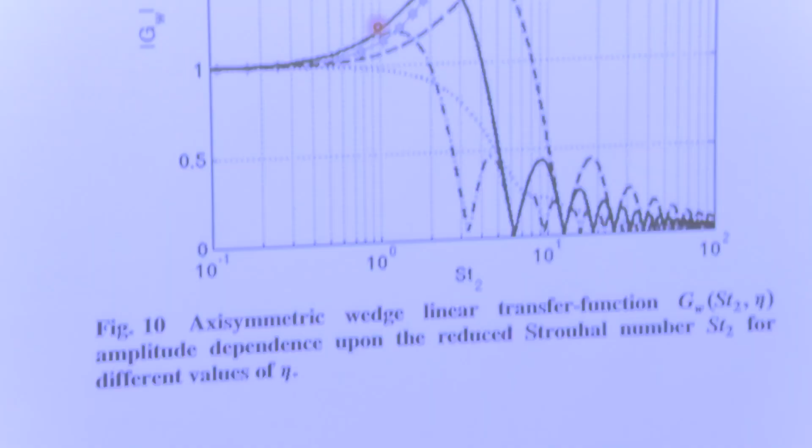The other thing to note is that there's an envelope to this. That really beautiful envelope is the low-pass filter of the flame.

Okay, we are at 3 o'clock, so this works out well. This is a good time. Well, no, I'm going to show you one more slide, and then we'll take our break.

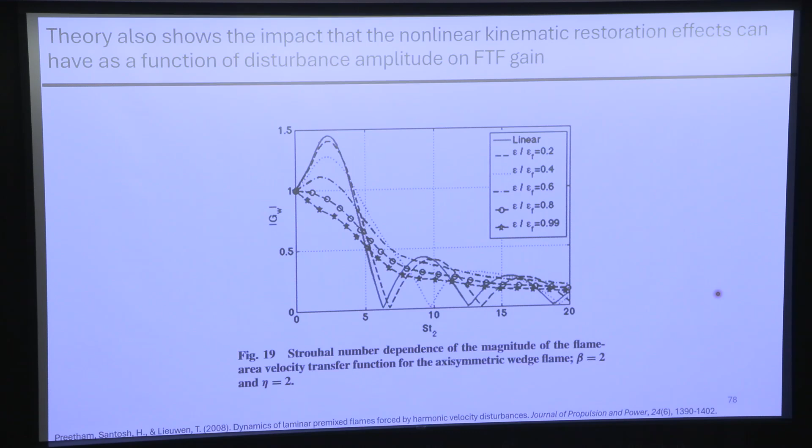This gets worse as your forcing amplitude gets higher. So this is now Strouhal number, same beta, same wedge flame. For a constant eta - eta of 2 - your base wave convection velocity is less than your local wave convection velocity, but now we're really amping up the amplitude of the initial input. Epsilon is u prime over u, the incoming fluctuation.

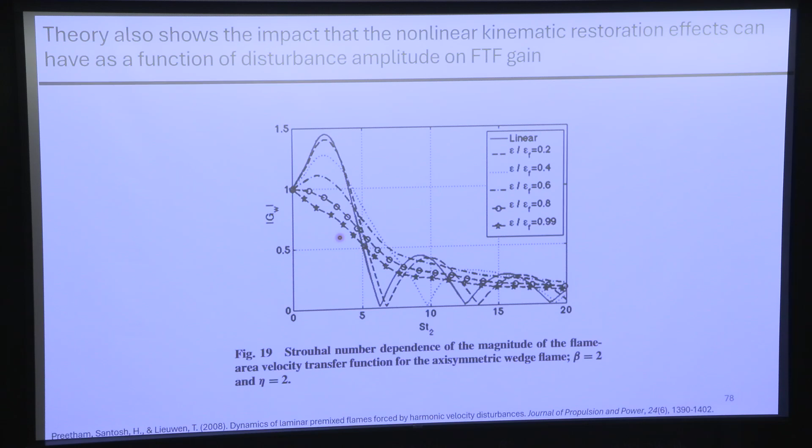In the linear limit, which they did analytically using an asymptotic expansion, you get very clear response. But as you increase the amplitude, you're basically creating more and more severe wrinkles that then kinematically restore themselves faster and faster. And so these effects - this convection time that you need to see that interference, the constructive and destructive interference - becomes too long before these really severe flame wrinkles destroy and annihilate themselves.

And so at some point, you don't even see the interference anymore. All you see is the low-pass filter behavior of the flame, because you've created such significant cusps that they burn out faster than the interference can happen as the disturbances move along the flame.

Okay, so as we go into coffee, key point: nodes and antinodes in your flame transfer function tell you something about the interference of multiple disturbances. And the sources of those multiple disturbances in a simple flame like this are the base wave and the local. But when you get to more complex flames, which is what we'll look at when we get back, you can have even more disturbances that complicate the picture more.